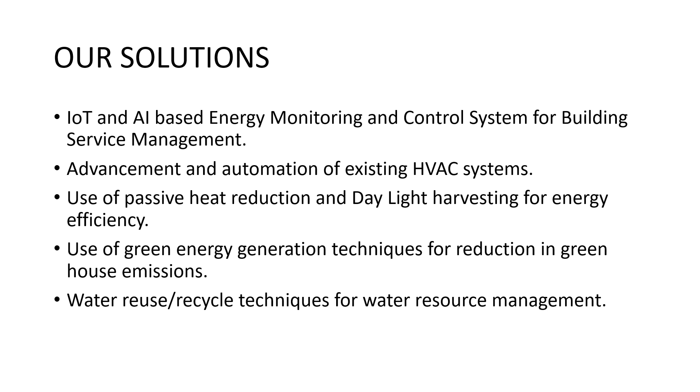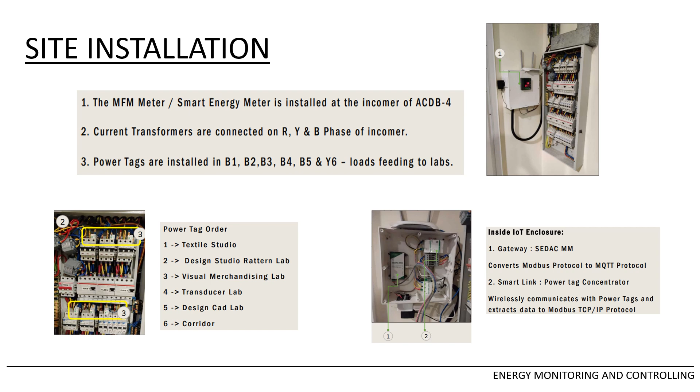Step number 1 is IoT based energy monitoring and control, which is the major innovative part of our system. We have already started this phase 1, where smart energy meters are used, with power tags and IoT based gateways to collect and store the data. This is how the overall architecture looks like.

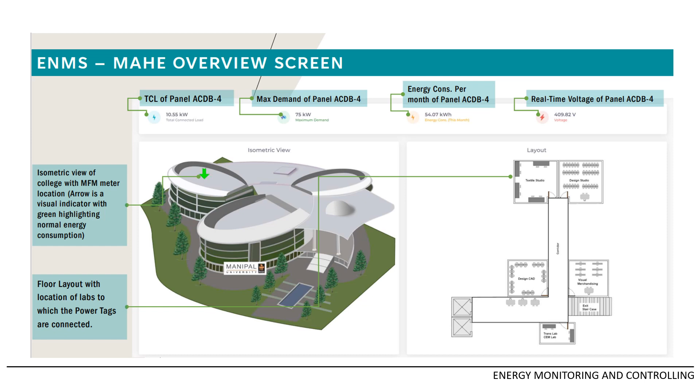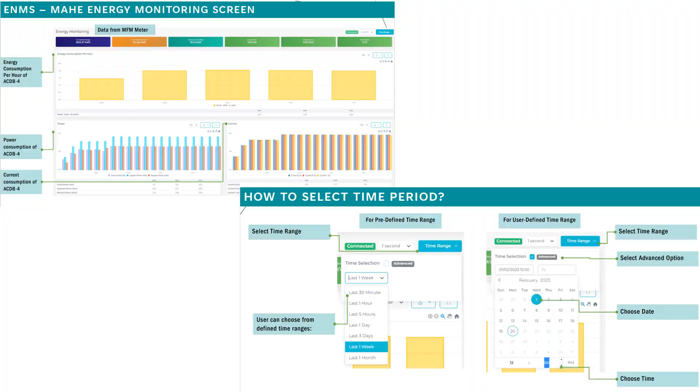This shows where this is implemented, and this is how the dashboard looks. We can collect the data for whichever period we want, so that we can analyze it. Power tags are used, which you can see on the dashboard, showing the power tag and its variation.

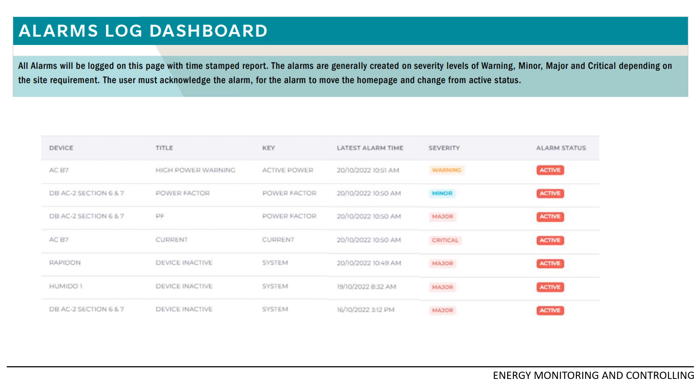We also have an alarm system, so wherever the limit crosses beyond the set limit, we get an alarm. Overall data collected can be given to an AI system, which can be used to train algorithms and take action based on PLC and automation, helping reduce overall consumption. It is very useful and innovative.

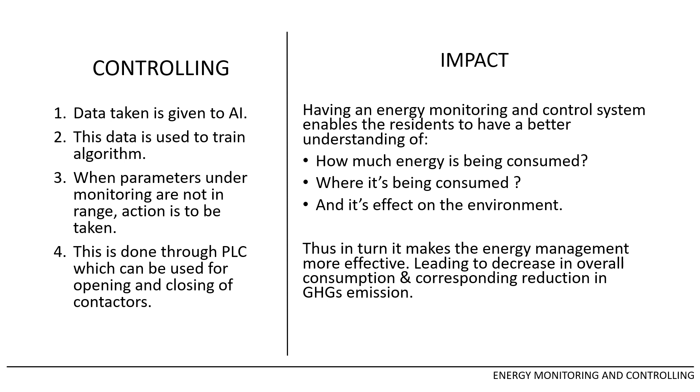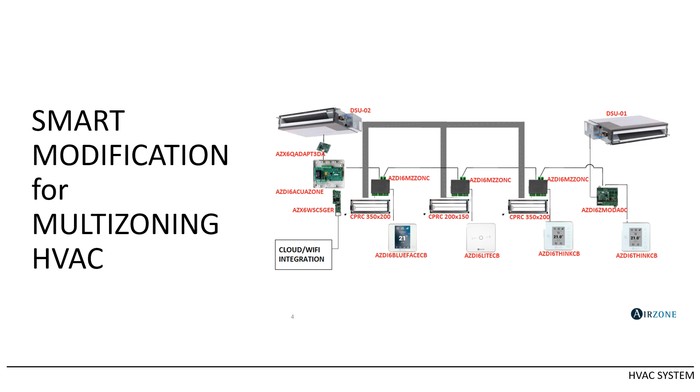Another solution is advancement and automation of the existing HVAC system. Here we propose an IoT based system where the existing system is slightly modified with thermostats controlled using IoT, and as and when required by a multi-zoning system, we can control and reduce the wastage of energy very effectively. We use PIR sensors and CO2 sensors to check presence.

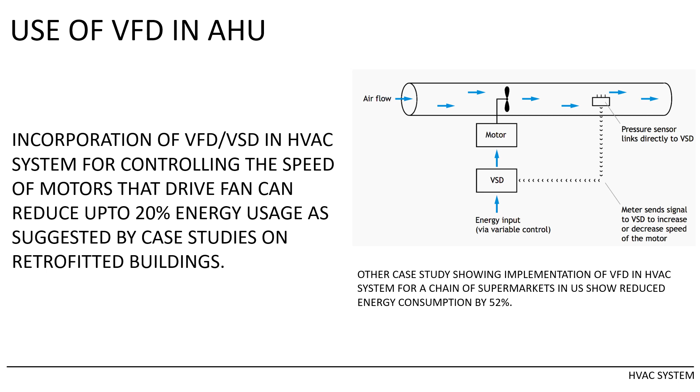We are also proposing motor and damper control, where the motor speed can be adjusted to reduce speed as per requirement. Air filter monitoring is also one of the proposals.

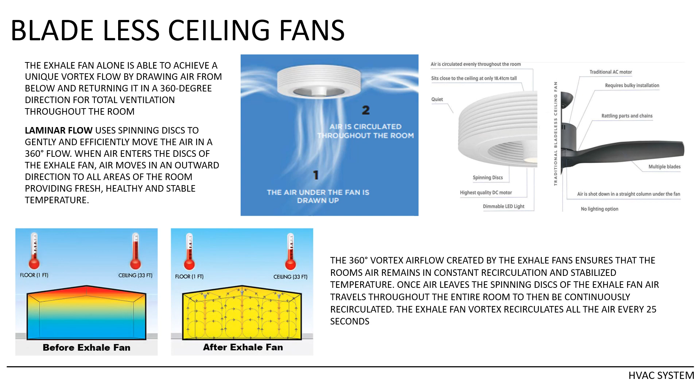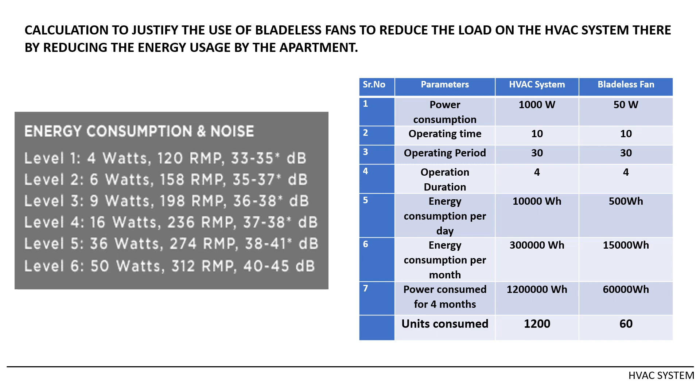We are proposing a very new and innovative technique with a bladeless ceiling fan, which will be used against HVAC whenever it is not required in certain months of the year. The bladeless fan requires only 50 watts of energy, whereas the HVAC system requires 1000 watts of energy, so it becomes important to use the bladeless fan as and when we are proposing here.

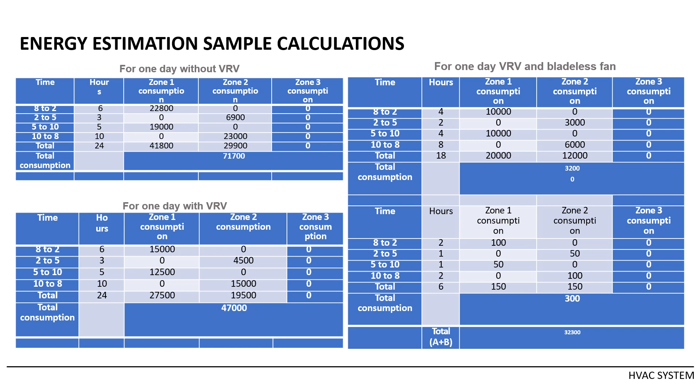With the existing system, we require around 71.7 kilowatt hours of energy. With our proposed new system, only 47,000 watt hours will be used. However, with the bladeless fan and VRV system combination, we can get only 32.3 kilowatt hours of consumption, a lot of saving here. This saves energy and money, and of course the greenhouse gas emissions will be reduced.

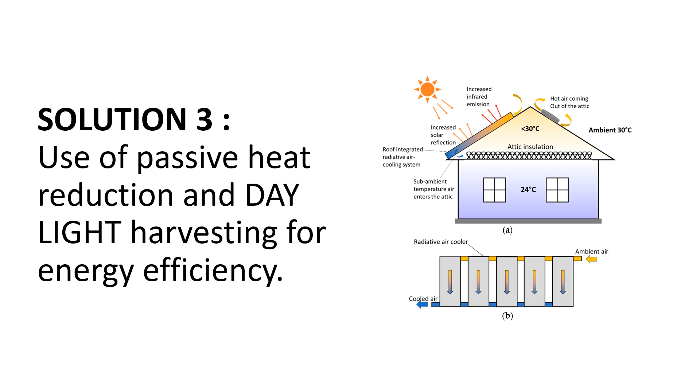Next is use of passive heat reduction. Here we are proposing two techniques: one is dynamic shading, and the other is an interior light shelf for automatic blind control.

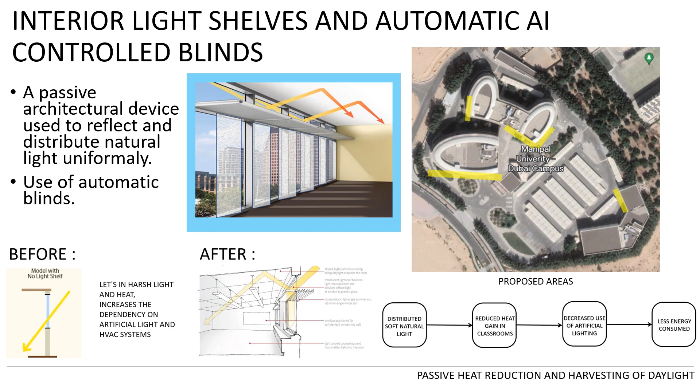As per the sun's position, the dynamic shading will vary and shade the window, so only the required light will enter and heat will not enter, reducing a lot of energy use. Solar tubes are also proposed in some parts where a lot of light is used in a day, to harvest daylight without increasing the heat load in the place.

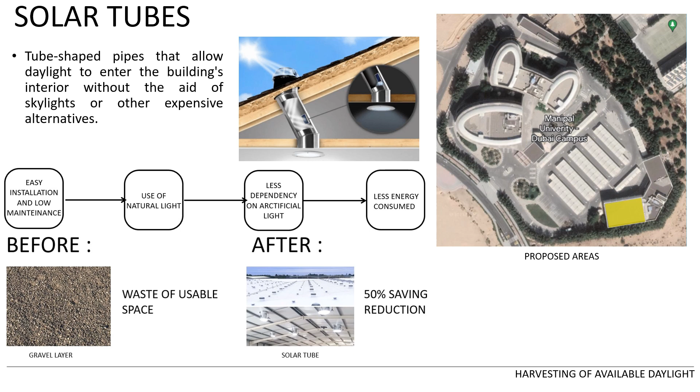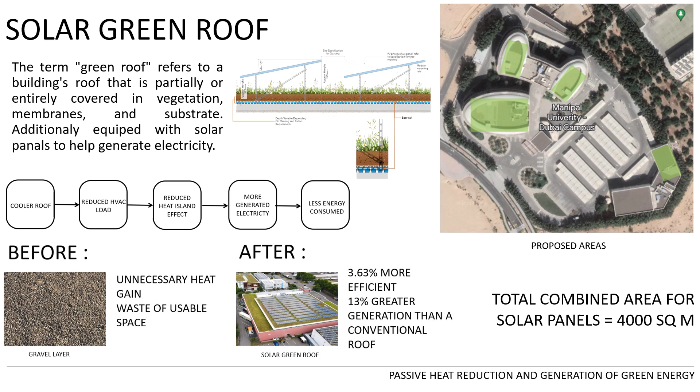There is a very important thing required in order to get greenhouse gas reduction. We have solar panels that can be put on the roof and also on the parking area. Overall area available is around 4,000 square meters, and we can put solar panels on 2100 square meters. Annual consumption is around 100,000 kilowatt hours at present, with an annual bill of 650,000 AED.

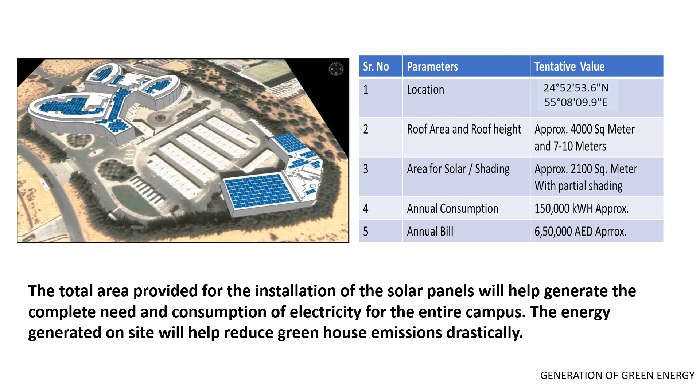With the help of this, we can generate green energy. See the graph, these are the actual calculations. Per month consumption is shown in orange color, however the green color shows how much we can generate using the solar panels.

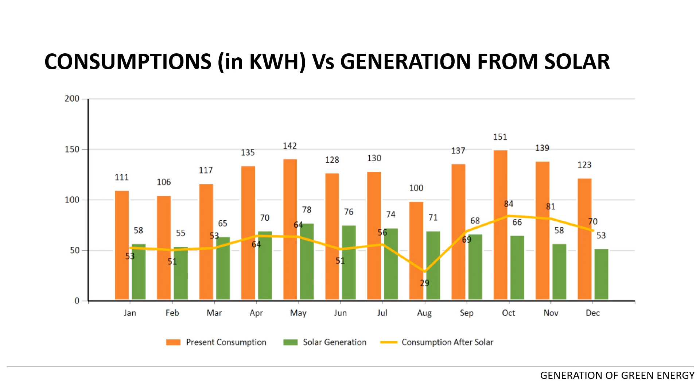So a lot of saving can be done in order to reduce the greenhouse effect. Using the calculator, whatever saving we are doing in terms of 790 kilowatt hours, we calculated how much greenhouse effect is saved. There are so many parameters controlled now, so the overall greenhouse effect is reduced, and you can see the controlled parameters, which is really significant.

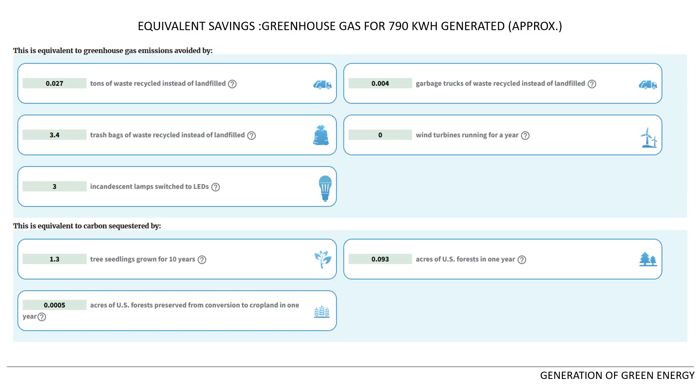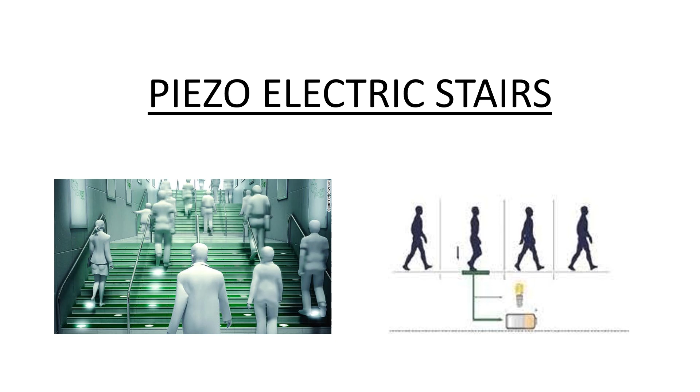We are proposing a piezoelectric staircase in the building, where the implementation is simple but the generation of electricity is good. That is also done for one building.

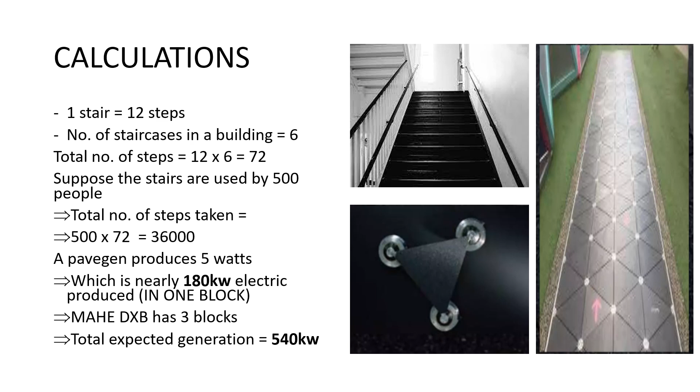We have estimated around 500 people using it, so total 180 kilowatts of energy can be generated from one building, and with 3 blocks like this, 540 kilowatts of energy can be generated. It's beautiful, and this is how some implementations are practically done in the world, saving a lot of energy in terms of green energy generation and overall reduction in carbon footprint. Last part is water recycling.

We are using an indigenous method developed at MAHE, Manipal Academy of Higher Education, where date palms and charcoal are used to convert grey water into useful water.

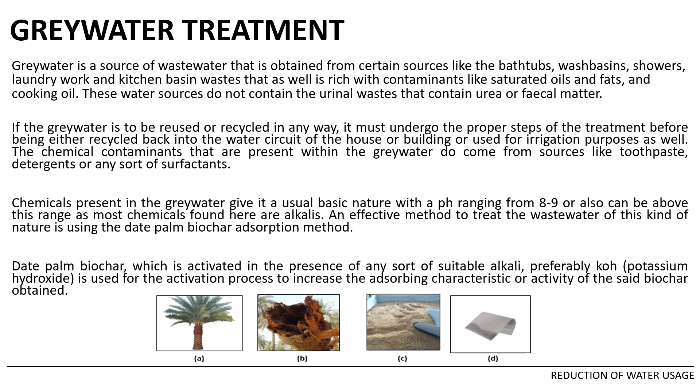Very simple solutions we are proposing: grey water is collected in a tank, and chemical oxidation is done. Then grey water can be used for recycling, for flushing and other purposes, and the sludge created undergoes solar incineration, producing biogas and biochar that can also be utilized. Overall, energy saving and water consumption are addressed.

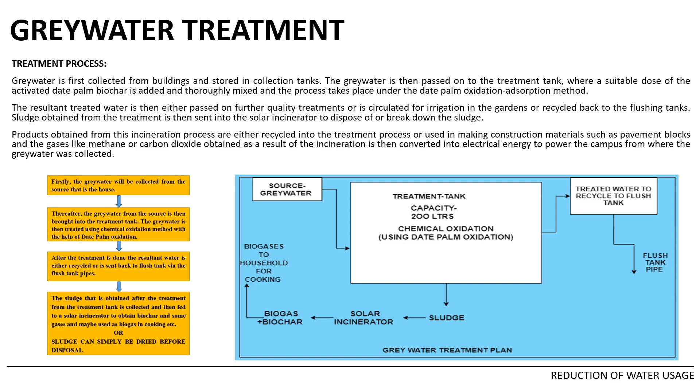Therefore, we are able to propose an expected reduction of 15 to 20% using energy monitoring and control, around 25 to 30% by the HVAC solution, 10 to 15% saving by passive daylight strategies, and 25 to 30% saving with green energy generation techniques, with water recycling also being useful. So it helps us in aligning with the SDGs and maintaining the Paris Agreement.